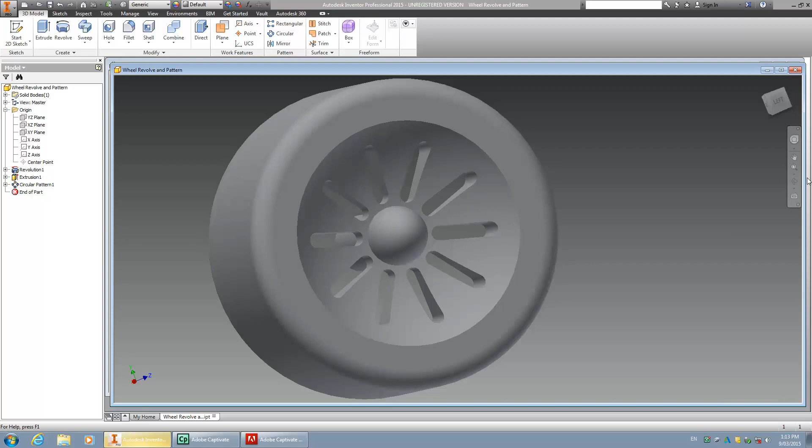Okay, well, we're looking at creating a revolved wheel section here in Autodesk Inventor. So there's our wheel that we're looking at trying to make, something along those lines, and it's a wheel that you could use in the F1 in Schools competition as a car wheel with a 3mm diameter axle hole inside here. So let's start from the beginning.

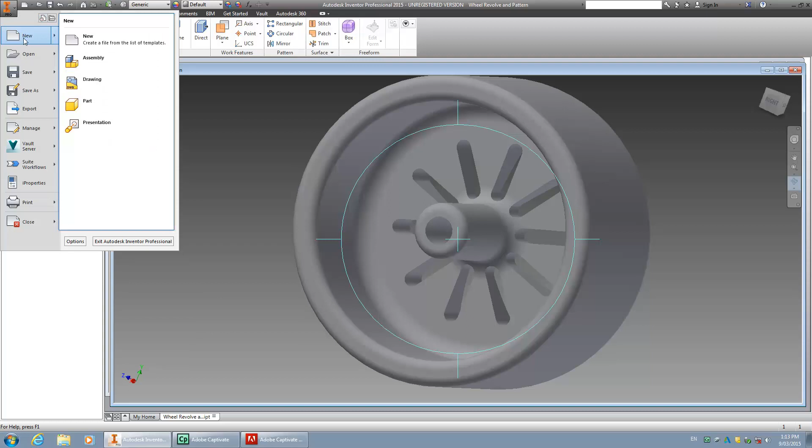We'll create a new part, and we'll call it, we'll save it as wheel 2 because I've done a wheel already. And it's going to save on my desktop, but you can save it where you choose.

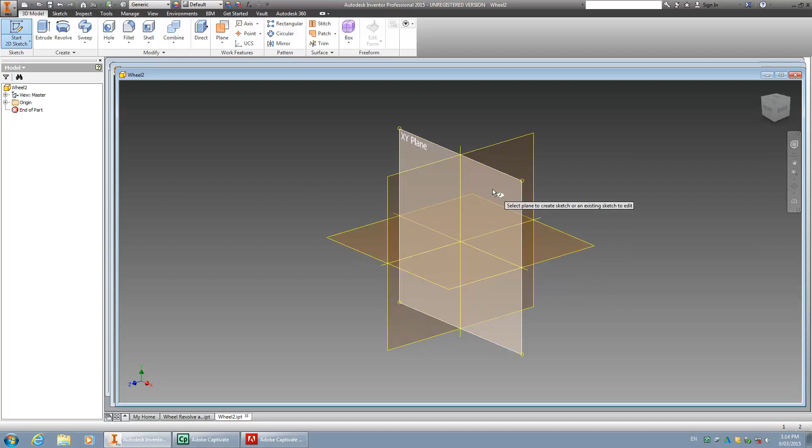Now it's wheel 2. Let's start with doing a sketch, and we'll start our sketch on this XY plane. And to start to get a feel for what we're going to do, I'll use the rectangle tool, 2-point rectangle tool.

Start from the center, draw out, and I'm in inches unfortunately. Now to fix that up, go into Tools and Document Settings, Units, and you can change here from inches to millimeters pretty quickly. Obviously my default's in inches.

Okay, we're now in millimeters, and I've got this sketch going on here, so I'm back into 3D Model, and I want to be able to edit this and deal with my dimensions.

So there's the dimension line. Left mouse button click, draw up, and you can second click to edit your dimensions. I want to make that, let's say I'll make that 20 millimeters. Okay, fine, and hit enter, and hit the zoom tool over here to bring it back into focus again.

Same thing over here, draw out with the left mouse button, and I'm going to make this 15. Hit enter. So I've got this shape here, there's the center of the universe. Now I'm going to do some other work with this shape.

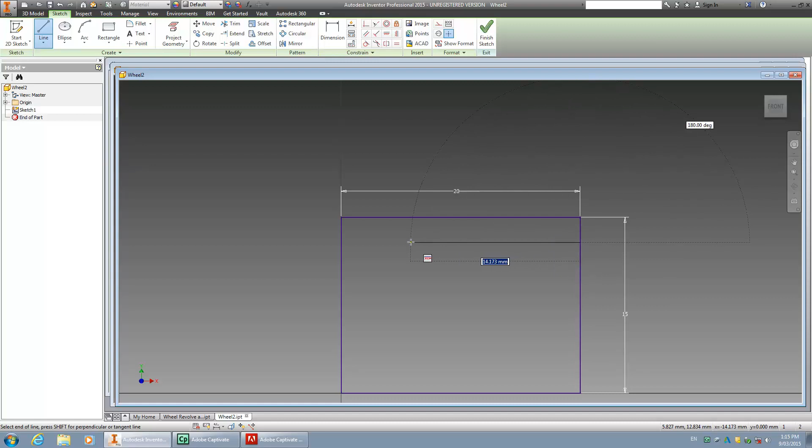I'm going to use the line tool and draw in here and create another profile. And I'm deliberately doing this, as you'll see in a minute why, as a quarter of a circle profile. And we're going to revolve it, but just for the moment let's stick with this.

Something a little bit more interesting to make it a bit different. I think I might try an ellipse in here. So under the rectangle, or I should say the circle button here, circles or ellipses, I'm going to choose ellipse, and what type of ellipse? We'll go for there. And with an ellipse you need to organize an axis and then draw out your ellipse from that axis.

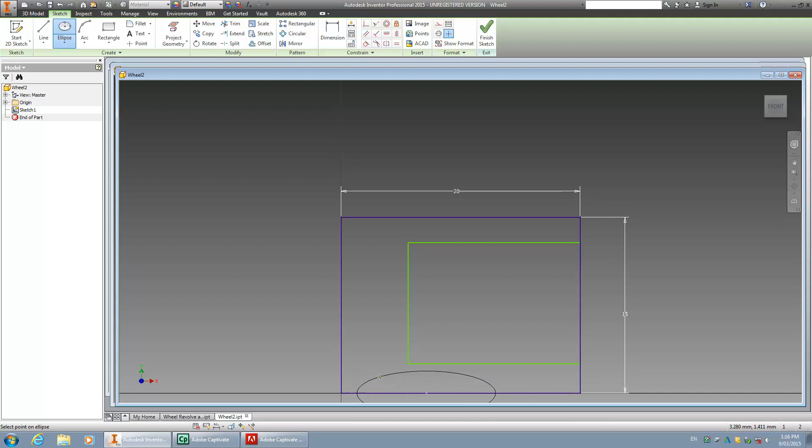And I'm going to do it like about there. Alright, that's good. I'm going to shrink this in for view purposes. And now I'm going to draw an arc, and I'm going to use a 3-point arc up the top here.

So my starting point will be over here. My finishing point I want to make about there on the ellipse, and I want to give it a bit of an arc like so. So I've got those shapes going on, and I'm going to be fairly happy with those just for the present point in time.

I don't want to define them completely yet, except inside here I do. So I want to create another dimension between this line, left click, this line, drop down, and then click it a second time and draw across. And I want that dimension to be 3 millimeters.

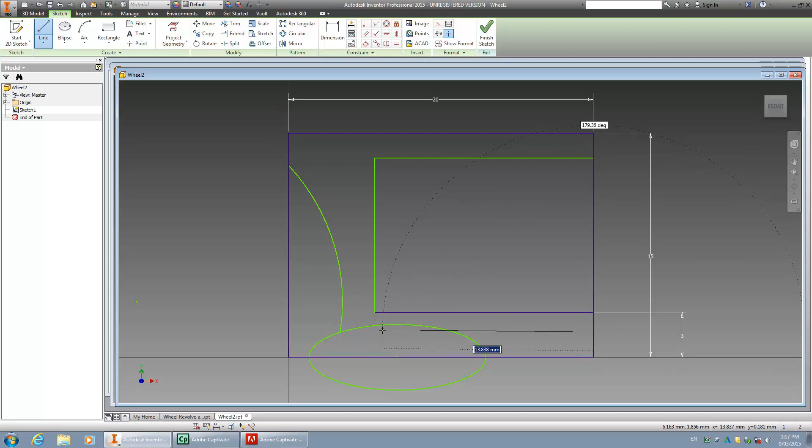Clicking enter. And then I'm going to draw a couple more lines in here because I'm going to create the axle hole. So from here all the way to, say, there, and drop it down again. Hit escape to stop the tool.

Then I want to create another dimension. So I'll click dimension button here again, between here and there, draw this out, and I want that distance to be 1.5 because when it's rotated around we want to have the diameter of the axle to be 3.

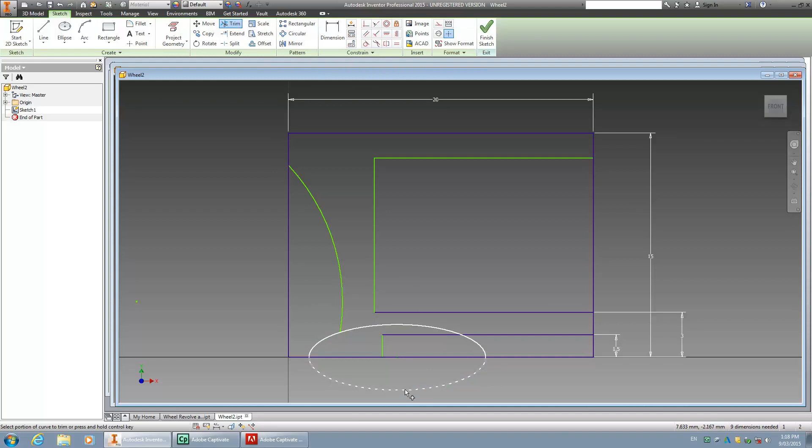Alright, so let's use this trim tool up here under the modify tab and get rid of some of the lines that we don't want. So for example, this line I don't want, so just by hovering over it, it will remove between the 2 points of intersection the lines that you're not interested in.

And what I'm looking for here now is to get myself an entirely integral shape which removes, have a profile which I can spin around and create a revolved section. Try and move this one over there. Yeah, that's good. So that looks like a continuous shape. Looks a bit odd, but in a minute you'll see it kind of works quite well.

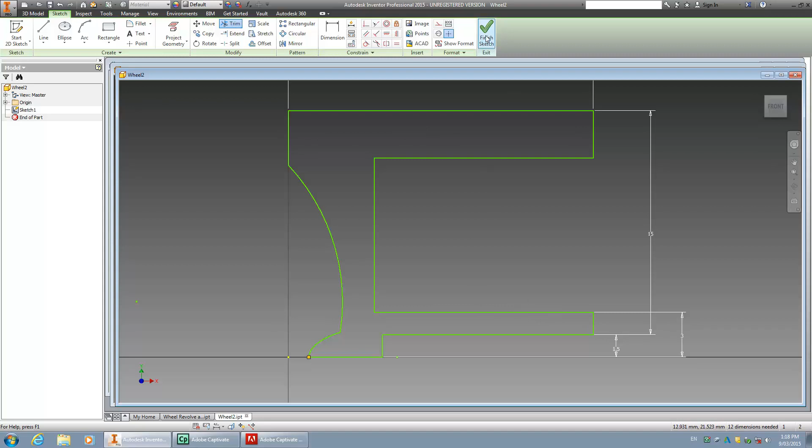So I'm going to finish this sketch. So I'm happy with that, and there it is in 3D shape space. Now next thing is to use the revolve feature.

Click on the revolve feature under the create tab over here on the left, and we're going to be asked a few things. One of them is to select the profile. Now there's only one profile here, so it's automatically selected. The next thing is to select an axis. So the profile selected, the axis tab needs to be checked. Down the bottom here, it's always a good little command center to look at.

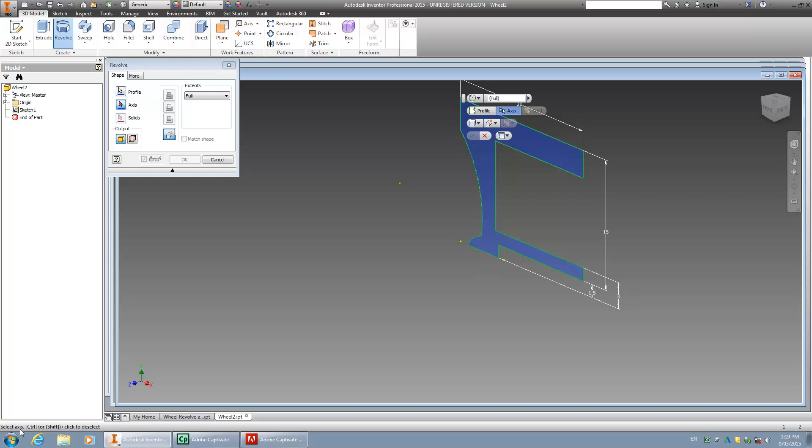It gives you some instructions on what Inventor is expecting you to do next. So select the axis. I want to revolve this about this axis. And there we have now a wheel shape.

Now I can choose to spin it around about a certain number of degrees. I can do lots of things, but for example, we can go to a next face, to an angle, or to a point. But I want the full 360 degrees there, and I'm pretty okay with that, so I click OK.

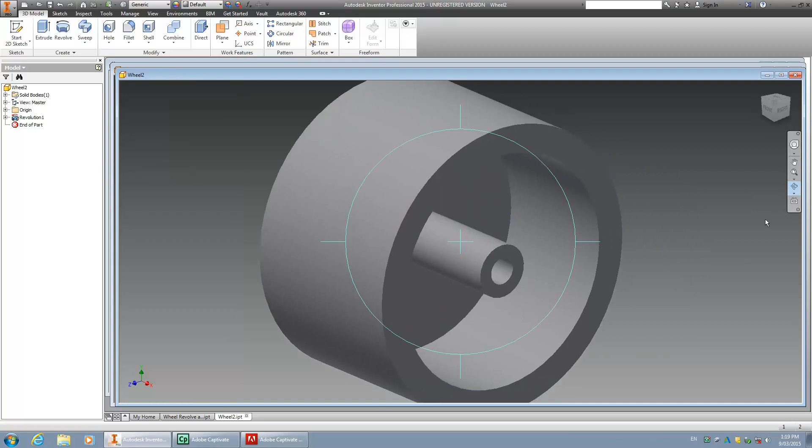Now just to show you what this thing looks like now, I'll move it up here a little bit. There's my wheel. I've got this central hub, curved surface over here. It's all looking pretty good, and a 3mm axle hole.

Okay, from now I want to create some slots in my wheel. So I'm going to draw another shape. Start another 2D sketch. I'll exit out of the orbital tool.

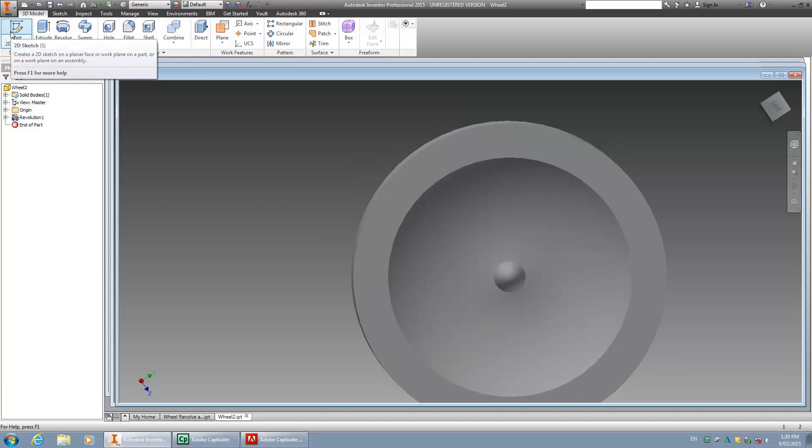Start a 2D sketch, and I want the sketch to be on this plane. So I'm going to create an imaginary plane on the top surface of this wheel. Let's go and we'll do that, and now we're going to start to draw a slot.

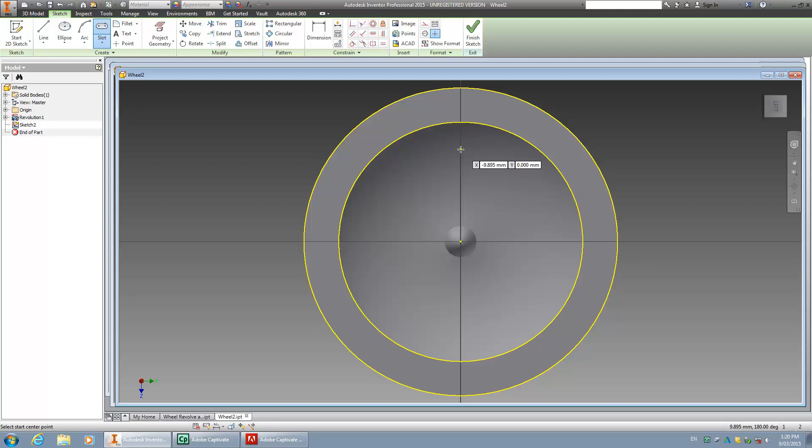You can find the slot under the rectangle menu. There it is there, lots of sort of slots. By highlighting the two diameters or the two center points of the circle of the slot, you can draw a slot. Just drag it out to the width that you want. Left click, and there's your slot on that plane, sitting on this edge.

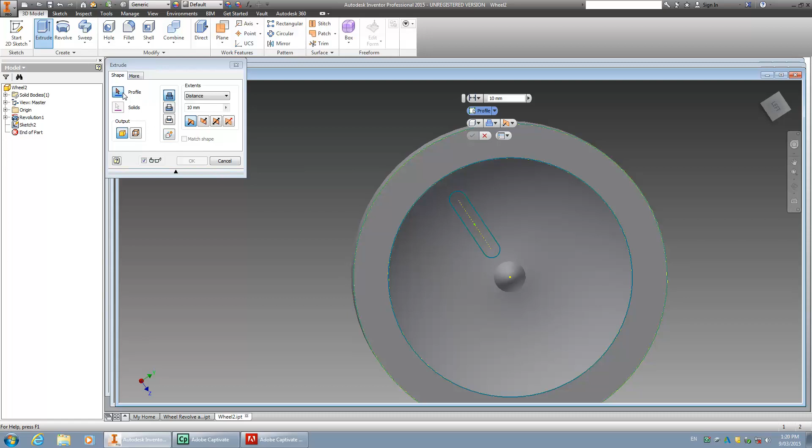Okay, I'm going to finish the sketch there. The slot's sitting there, still a bit undefined, but I'm going to extrude this slot. Now when I hit the extrude function, this dialog box pops up asking what profile it needs, so what do I want to extrude? It's selected this slot because I've hovered over it and it's grayed out.

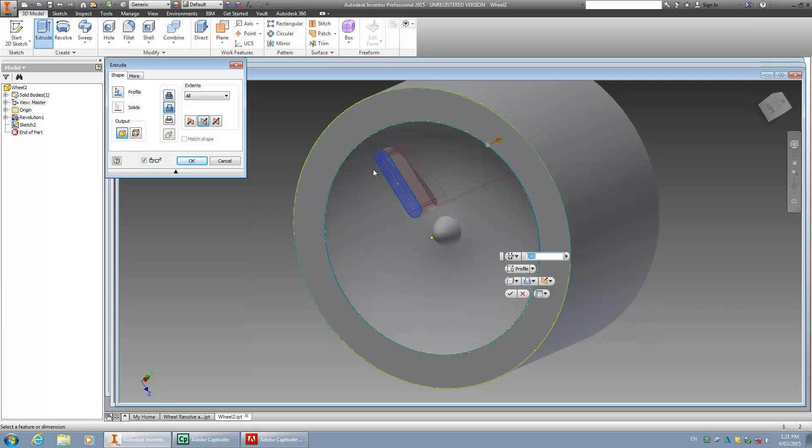I'll move it around a little bit so you can see it's extruded it the wrong way. I want it to go the other way, so just click the opposite direction, extrude plane. How far do I want it to go? I want it to go all the way, so we'll go that way. And I want it to cut material, so use the cut material function there, and it'll project that geometry, that cutting plane through, and create a slot. We'll click OK. So there's our slot.

All good. Now that part of it is good. However, what we need to do now is move this around and create more of them. So to do that, it's very easy with the patterning tool. There's the patterning tool, and we want a circular pattern, not a rectangular.

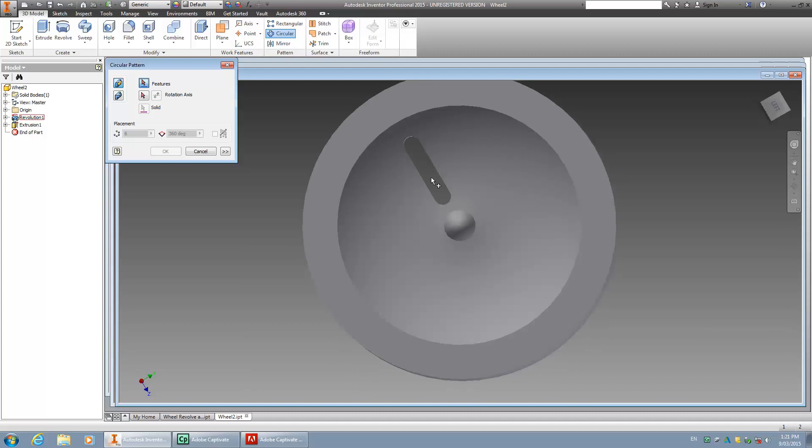We're going to be asked what is it that you want to pattern. Now I've got to select the appropriate geometry. I'm going to cancel out of that for a minute because I want to revolve this a little bit further, just to make it a bit easier for the selection process. So let's go back to the pattern tool.

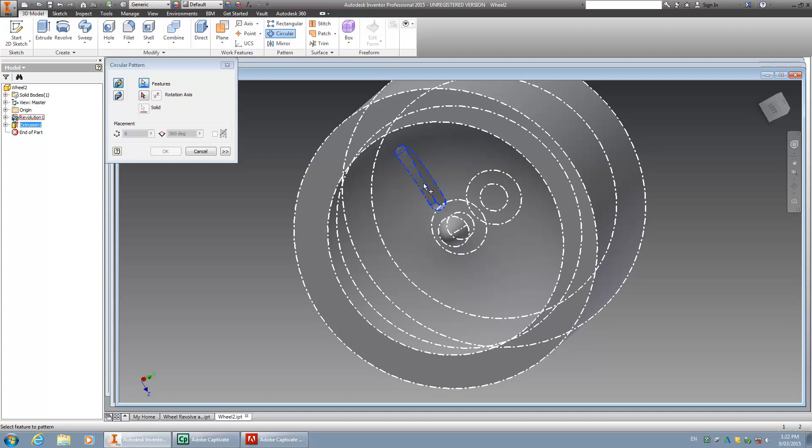Click circular pattern, and now I'm going to select the geometry. You can see how it goes into that dash dot format. That's the geometry that I want to pattern. I want to do it about an axis, so I'm going to select the axis now. So that's the feature that I want to pattern.

Now I'm going to select the axis, and I want the axis to be in here. I don't have an axis through here, but I do have a circular shape that will double as that, and that's the axle hole. So if I click that, automatically Inventor's placed a pattern and guessed that I want to do 360 degrees.

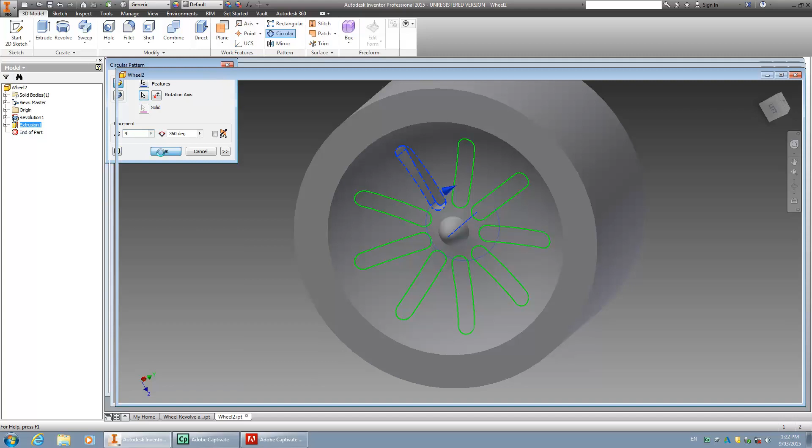And I want to have 5 of these slots, but I can change that up here. I want to go 10 - that looks pretty sporty - or maybe 9. I can do whatever I want. What does 9 look like? Yep, 9 looks a bit better. So I click OK, and now we've reproduced the slots all the way around.

Now of course what you can see when you turn this around is that the slots may not be in exactly the right position, but you can alter those. See how they've created a spiral kind of shape through there? I could change that by editing my pattern and simply editing the original shape.

So if I can get out of this orbit tool, on the left here on the browser I can go to my extrusion here, and my extrusion sketch. I hover over it, it highlights. Right click, I can edit that sketch, and I can change the sketch.

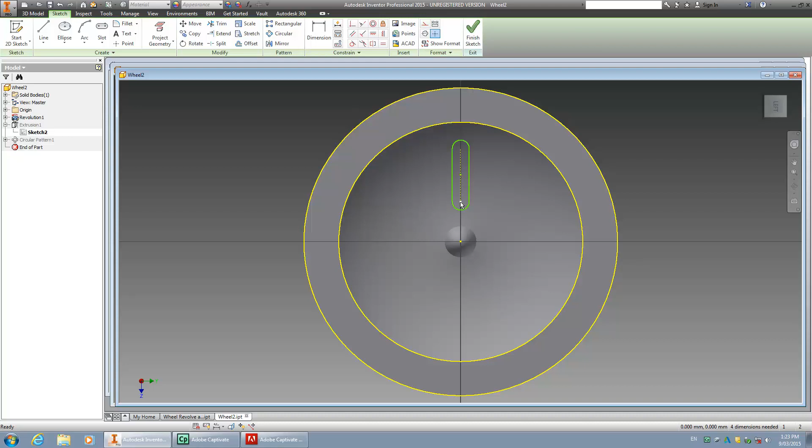It's easy enough for me, should be able to do it, and drag this up a little bit. There we go, like that. Make it a bit bigger, finish the sketch, and my pattern will reproduce now into the larger shape that I wanted, without causing dramas.

Let's orbit so we can double check, without causing dramas on my central hub. Okay, all done, and there you got yourself a fine looking wheel. Thank you very much.